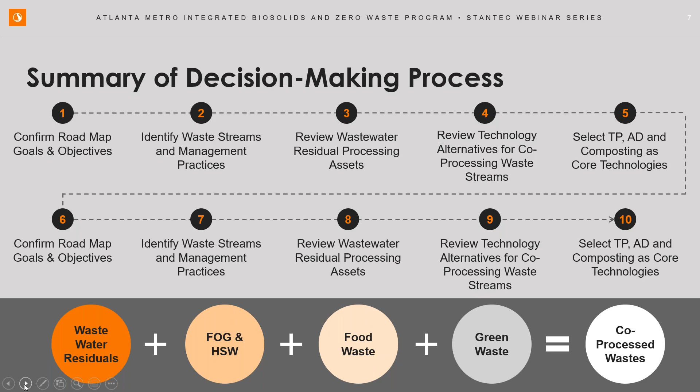And I will turn it over to Drew to delve into the technology approach. Thank you, Mikita. So the first thing we did once we got all of the various utilities on board was...

of course do some projections on the amount of residuals from each of the wastewater facilities, as well as look at the food waste recovery, high strength waste, and fats, oils, and grease recovery that could be co-processed with this facility. The table to the left shows all the different geographic areas and the various wastewater facilities included, and then projected out the dry mass of material associated with those out to the year 2030, which was a total cumulative amount of over 300 dry tons per day.

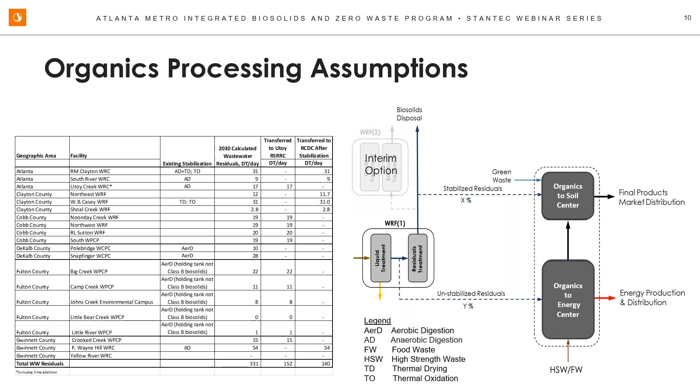Then we went through a binary decision process of where the best place to send that waste would be if we were to regionalize all of these entities included in the geographic area. We determined, based on the waste stream characterizations, that we would transfer 152 dry tons to the Utoy Creek facility, which is really our energy production facility, and then 140 dry tons would be transferred to the regional organics to soil center.

This is a little bit different breakdown and shows some of the temporal aspects of what we're doing. On the top portion, there's really an immediate need to try to relieve some of the financial pressure some of these entities are under. At the Atlanta R.M. Clayton facility, there's a new thermal drying system being commissioned now. So one of the first steps is to take advantage of some of the excess capacity at that facility, design an import receiving system, and co-process imported residuals at R.M. Clayton to try to be as responsive as possible to relieve some of that financial pressure, as Mikita stated earlier.

And then in the center portion, the next aspect of this is to design and build a regional organics to energy center. I'll get into a little more detail, but that's really our facility where we're anaerobically digesting with an intensification process called thermal hydrolysis to produce as much biogas as possible and convert that to energy. We then have Class A biosolids that would be transferred down to a new regional facility, an organics to soil center, where there would be some additional processing of Class B waste, and ultimately that would be stored, marketed, and distributed for 100% reuse from that regional center.

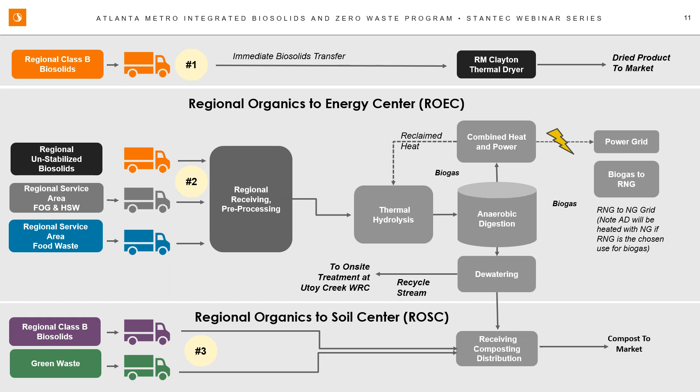So at the Regional Organics to Energy Center, again, this is at the Utoy Creek facility, which is one of Atlanta's facilities. There are many steps that would be included in the intensification process. The first couple steps are primarily handled at other facilities that are planning on importing waste to the Regional Organics to Energy Center.

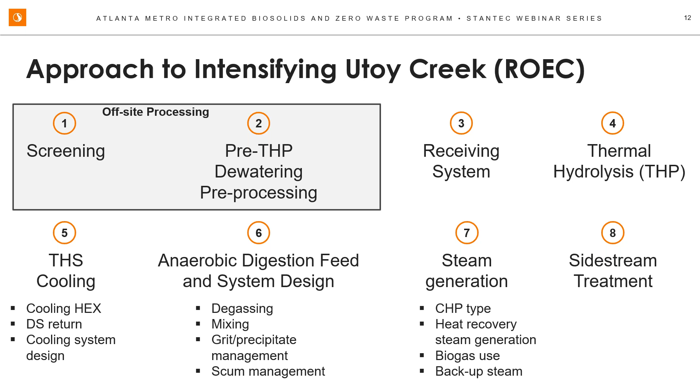Those would include steps for screening to ensure all debris is out of that feedstock, and dewatering to ensure it's at the correct concentration for subsequent processes at the Utoy Creek plant. This would also include pre-processing of material such as food waste separated out of municipal solid waste, to ensure it meets the specifications required for processing at the Utoy Creek plant. At Utoy Creek, we'd have a receiving system, a thermal hydrolysis process for pre-processing, a cooling step, the anaerobic digestion system itself. We'd need steam generation for the thermal hydrolysis, and potentially a side stream treatment process for the return stream back to the Utoy Creek plant.

This diagram shows the process flow diagram for the facility, which includes the feedstocks on the left-hand portion. There would be some indigenous material from the Utoy Creek plant, including waste activated or biological sludge, as well as primary sludge. That would be combined with the imported, screened and dewatered wastewater residuals from other facilities, as well as up to about 100 dry tons a day of additional food waste, high strength waste, and fog, all combined prior to the thermal hydrolysis process.

That is a high heat and pressure system that operates at 320 degrees Fahrenheit, and it's a batch process, so it meets Class A. Coming out of that, the material is cooled and then goes on to a two-stage anaerobic digestion system where we squeeze as much energy out of the residuals as possible, and then that is recovered. In this case, we'd be looking at a combined heat and power system to recover that heat and convert it back to steam for the thermal hydrolysis process itself, and then final dewatering and out.

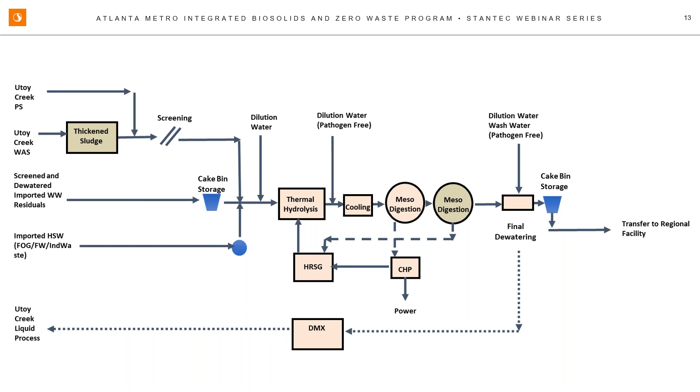One important factor is that with the level of material being processed at the Utoy Creek plant, it's important to have a plan for handling the return stream that will ultimately have to be processed. One key decision we made was to ensure we had a side stream treatment plan. It's not necessarily about the side stream treatment itself, but about meeting effluent limits that have to be managed. Some facilities implemented remotely don't have a wastewater treatment process to handle that side stream, and the economics become very challenging. So co-locating this energy recovery facility at the Utoy Creek plant, with additional liquid and solid processing systems, improves the economics for all potential participants significantly.

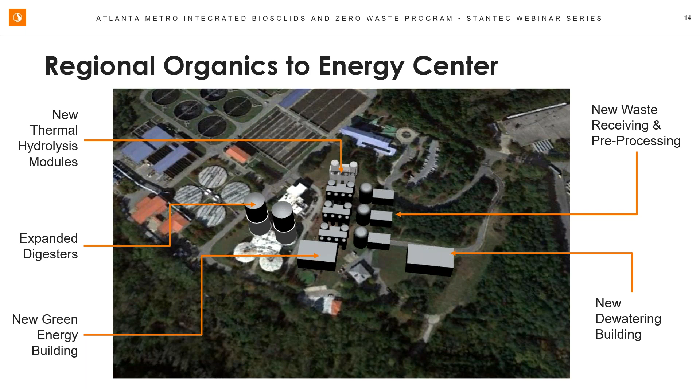On the lower portion of the diagram, you'll see the green energy building that houses the combined heat and power system. Over on the lower right-hand portion, there's a dewatering facility that would remove much of the liquid portion, giving us significantly dry Class A material that would be transferred to the Regional Organics Soil Center.

In sizing the system, we went through a sizing process to look at how many belt filter presses and thermal hydrolysis units we would need for final dewatering. We're planning on installing 6 belt filter presses that would have the firm and redundant capacity to meet the projected solids throughput. We're looking at a throughput into the system of over 200 dry tons a day, and into the belt filter presses something over 100 dry tons a day of material.

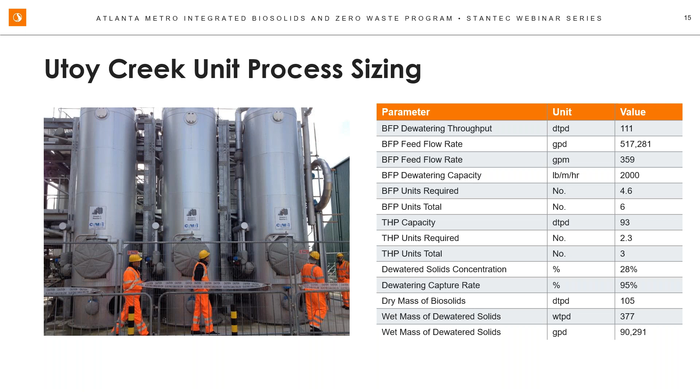The thermal hydrolysis units are sized based on a Cambi B64 system that has a capacity of over 90 dry tons a day, so we would need just over 2 units. The plan initially would be to have 3 of these B64 systems in place to handle the throughput based on the conceptual design analysis.

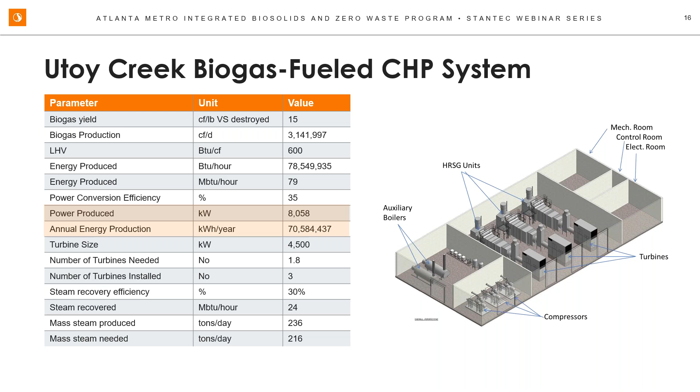Moving over to the biogas system, we're looking at 3 turbines for the amount of biogas we're producing. The estimated biogas production from this facility is quite significant, over 3 million cubic feet of biogas per day. Running through the calculations with a power conversion efficiency of these turbines at 35%, we're looking at over 8 megawatts of power production from this facility. Again, 3 of these turbines would be installed, 2 duty and 1 standby, so we can provide continuous power for the City of Atlanta.

As I said, the City of Atlanta had been contemplating several different uses of the land there. One of those was to look at a solar system on site. So the plan would be, in addition to producing 8 megawatts of power from the biogas production system itself, to supplement that with a solar power system that could be located on top of buildings, and there is additional area there that could still be utilized for additional production.

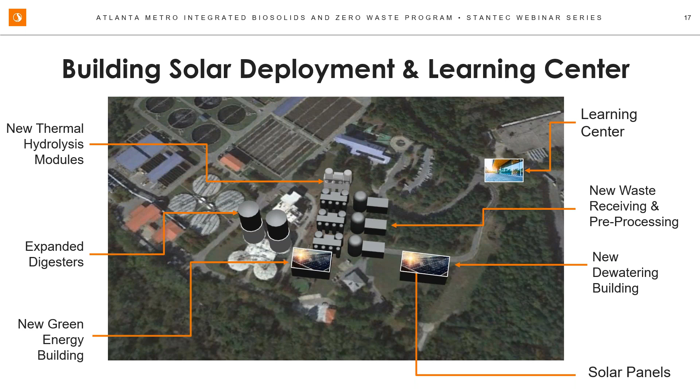To enhance the site of the facility itself and to provide an amenity for the citizens of Atlanta and the local region, the plan would also be to put in some kind of a learning center at the site. This really is such a broad vision and educational opportunity for local individuals as well as other facilities to learn from. We want to provide inspiration here and a facility that allows individuals to come visit and learn about the facility, how we're gathering waste, processing those wastes, converting them to energy, and recovering additional carbon and nutrients, utilizing them to make a full resource recovery system.

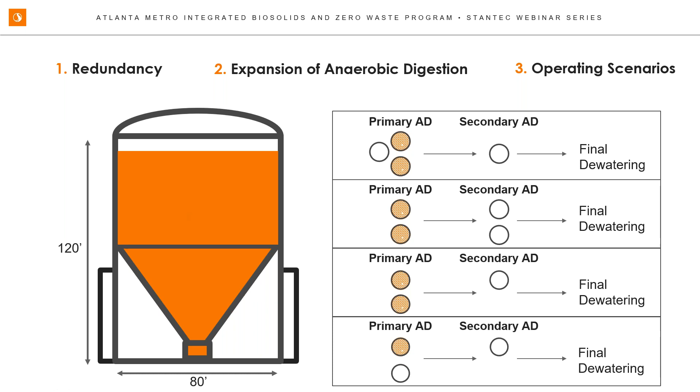So when we wrap this all together, we also wanted to look at this anaerobic digestion system that's really about energy conversion at the Utoy Creek plant, but we also have a thermal drying system at the RM Clayton facility, as well as another thermal drying system at the WB Casey plant, owned and operated by a potential partnering utility. And then we also have this concept of composting material as well. So it really opens up a lot of options when we categorize these different feedstocks based on their kinetics, or the biodegradability of the material.

We can really start to say, okay, if we have a strong management system with lots of levers to pull, how do we optimize that? Well, the material at the top that's readily biodegradable, including primary sludge, food waste, fats, oils, and greases, high strength waste, we'd really want to make sure we get that into the anaerobic digestion system, because that's the material that's really going to convert well to biogas.

In the center portion, when we have biological sludge, the plan is to put that into the anaerobic digestion system. But green waste, that type of material, is fully organic but it's not going to break down in a conventional anaerobic digester, so that's where we're recovering that and using it as a bulking agent for composting. And the Class B material that's already anaerobically digested from other facilities would be combined with that green waste and go through the composting system. All the residuals would go to this regional organics to soil center, and then we would distribute that to market.

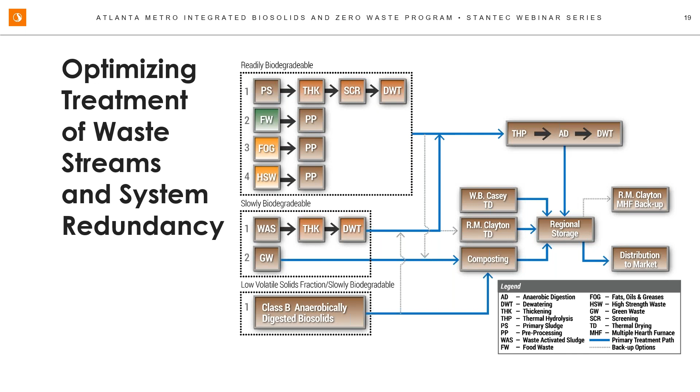Another interesting aspect is that the RM Clayton facility has a furnace system on site, which serves as backup if we have additional inventory that needs to be wasted from the regional organics to soil center, or if there's a disruption in the market. The blue line is our main plan for waste management, with many backup options that create flexibility in processing these different substrates, plus material at the back end that can be utilized in addition to biogas production from the Utoy Creek facility.

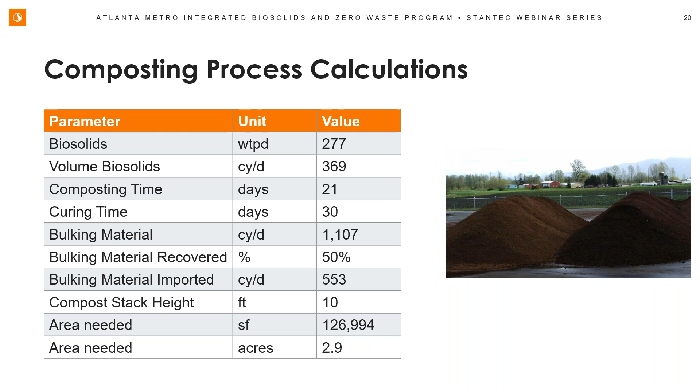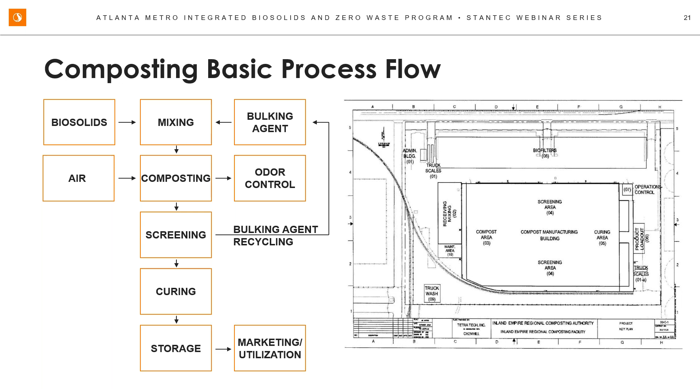For the composting system itself, we went through calculations for the level of material we'd be receiving and processing with an advanced aerated static pile system, and calculated the area needed. This process flow diagram shows that material imported to this facility would be mixed with a bulking agent, composted, screened, cured, stored, and then sent out to market.

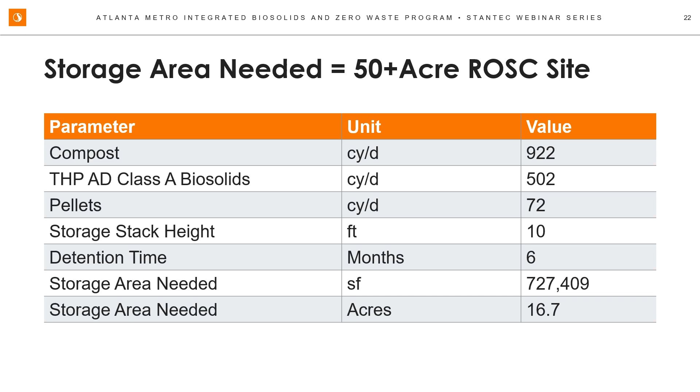If we combine all of the Class A material together, we're calculating that we'd need a required storage area just for the material itself of 17 acres. When you include all of the facilities and moving stock on the site, we're looking at a site of over 50 acres of land required for that regional facility.

For the Regional Organics to Energy Center, we have the Utoy Creek facility that's ideal for that, but we're still looking for and evaluating a new regional site for the Regional Organics to Soil Center, where all of the Class A material and green waste would be received, processed, stored, and distributed. We have a number of sites we're looking at for that, but it remains to be determined and finalized.

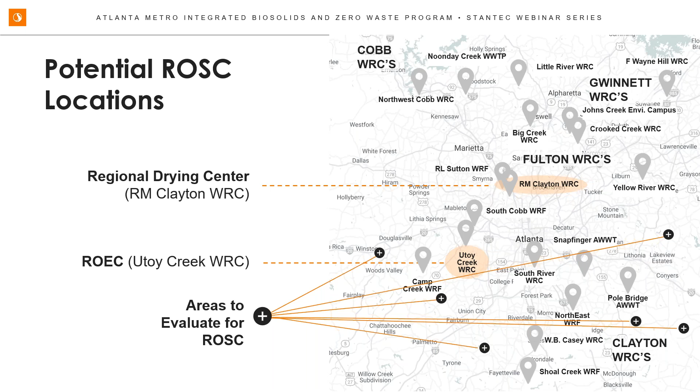And as Commissioner Browning indicated, we're also looking at taking advantage of existing facilities for that as well.

I just have a few more slides here. I want to present some of the economic analysis, which was really one of the main outcomes we wanted to examine, to look at the feasibility of the regionalization approach. Looking at the Organics to Energy Center, we calculated that the capital cost for this facility is $250 million.

Running through how we determined the net cost, we have debt service calculated at $15 million a year. Adding operating costs to that, we're looking at an annual cost of $21 million per year. We looked at some revenue sources from the biogas, as well as tipping fees for imported waste like food waste and FOG—fats, oils, and greases—which offset the $21 million a year by $10 million. So the net cost is calculated to be $10.8 million per year.

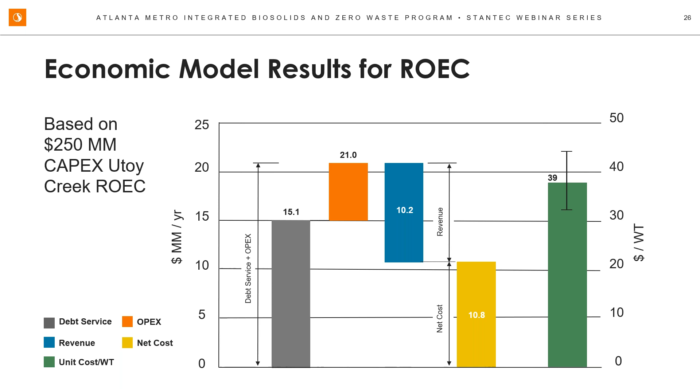When we convert that by dividing by the quantity of wastewater residuals coming into the plant, we're calculating the unit cost for this to be $39 per wet ton, which is quite attractive considering the current cost of disposal for facilities in the Atlanta metro region.

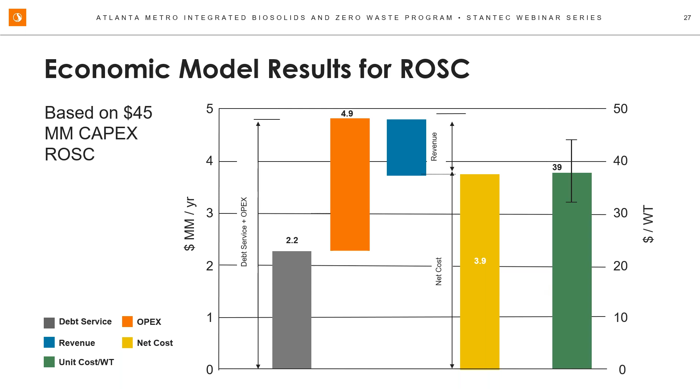We went through a similar calculation for the material processed at the Regional Organics to Soil Center. We're looking at a capital cost of $45 million there. Debt service and operating costs come to $5 million per year. Calculating a bit of revenue from the green waste transfer into the system, we get a net cost of $3.9 million a year. Interestingly, our unit cost for that turned out to be $39 per wet ton as well.

With that, I'm going to transfer it back to Commissioner Browning for going through the conclusions and next steps.

Thank you, Drew. So, conclusions and next steps: the steering committee identified several benefits for all participants, the other agencies we engaged with. To name a few, it's a transparent and open book process, which we thought would be appealing to all of the other agencies.

Shared benefits and risks include resource recovery from waste streams, increased landfill diversion, beneficial reuse of products, and capacity costs and revenue sharing, so we're able to spread the cost across all the agencies fairly. Something Drew spoke about is leveraging our existing assets, which is important. We also considered lower administrative and operational costs for shared assets, collaborative regulatory compliance and legislation, regional community and workforce development, and shared values, information sharing, and expanded communication across our utilities — benefits for all stakeholders.

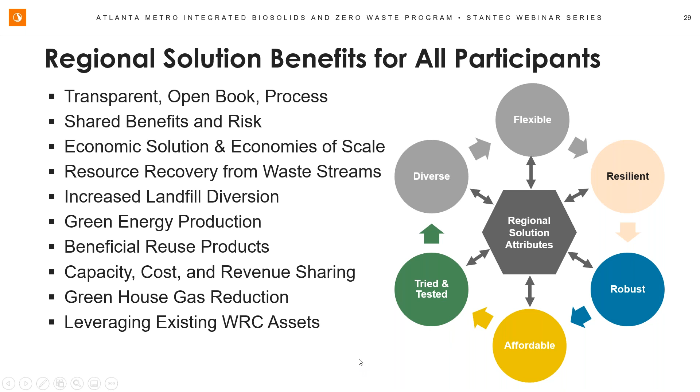So the anticipated next steps: out of the 5 agencies we engaged, based on current communication and coordination, we think we may have 2 to 3 sign on to participate. Once we get concurrence and agreement from those groups, we'll negotiate letters of intent with the jurisdictions, research and conduct off-take market feasibility studies, and prepare bridging documents for the expansion of our existing City of Atlanta facilities. We'll look for standard bridging documents for regional receiving, composting, and distribution facilities — that's the second phase. We'll prepare permitting applications, environmental due diligence, develop a comprehensive public relations and community outreach plan, and develop ownership arrangements for the regional facilities, where we'll really hash out the governance and rules of engagement needed for all parties involved in the solution.